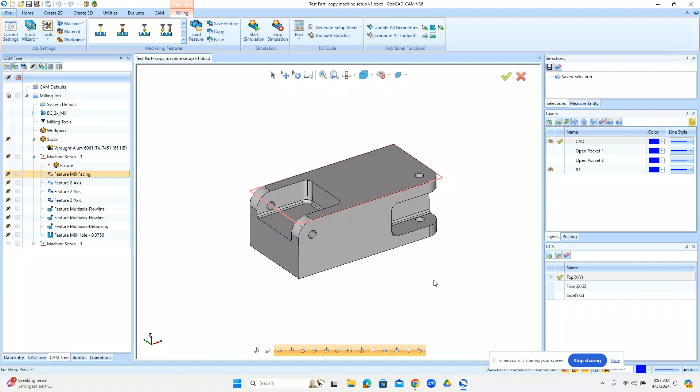Hey everybody, it's Al with CAD CAM Wizard, and today I wanted to talk about deburring. Not really a deep dive, but just kind of a sample. The other day I kind of went through the copy and paste of multiple machine setups, and what I want to do is get rid of that for a moment.

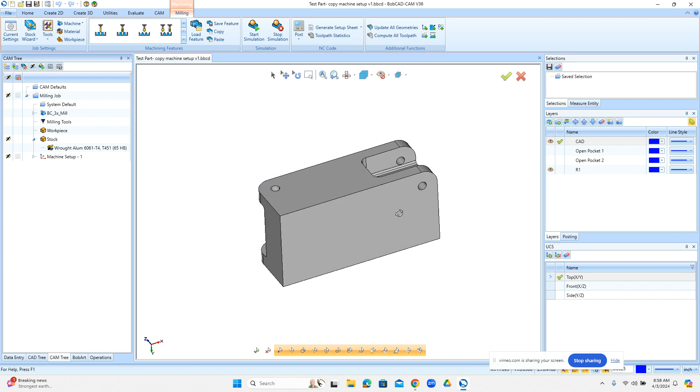And if we look at this part here, we can see there's a radius edge here, and we can see there's a radius edge here. Okay, the most efficient way to cut this radius is in this orientation. So either when this face is facing up, we'll be able to just run a profile around the part to put that on there. And when we're in this orientation, we can run a profile around the part to put that radius on there.

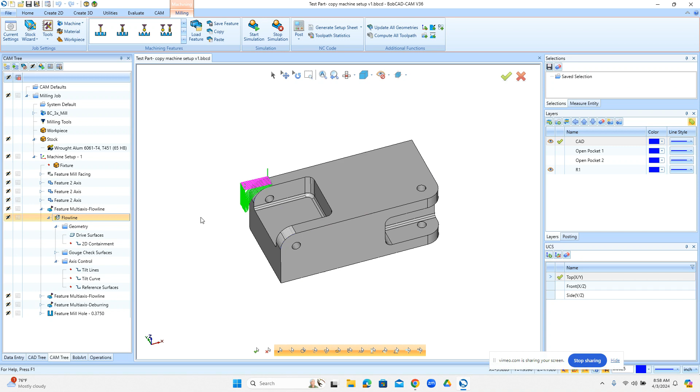Okay, now if we look at this profile here, I got an outside profile here to do that, but then I'm kind of left with this radius here, so rule of thumb is generally machine as much as you can within that setup. So that's kind of what I did. I came over here and I used some flowline routines to machine this radius here. But 3D is not going to be as fast as 2D, and the finish on this radius may or may not matter, but it's going to take longer, and it's not going to be the same finish as a 2D profile.

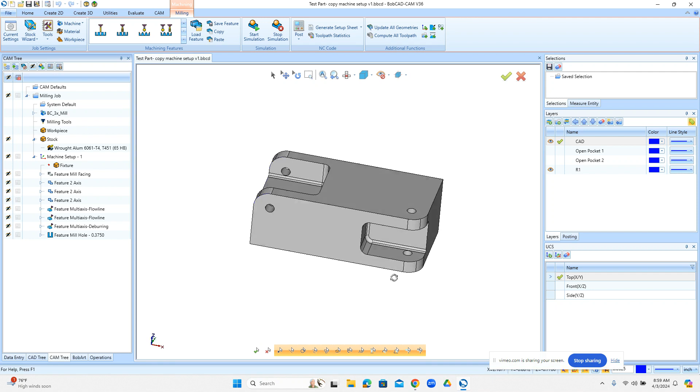So something you could consider doing is, when you need to come in here and break this edge, because you want to put a chamfer on it, you could either do that manually off the machine, but a lot of times we like to finish parts while they're on the machine for consistency and efficiency, right? So how can you break this edge here and be able to break this edge over here after this pocket is machined or what have you? How would we do that?

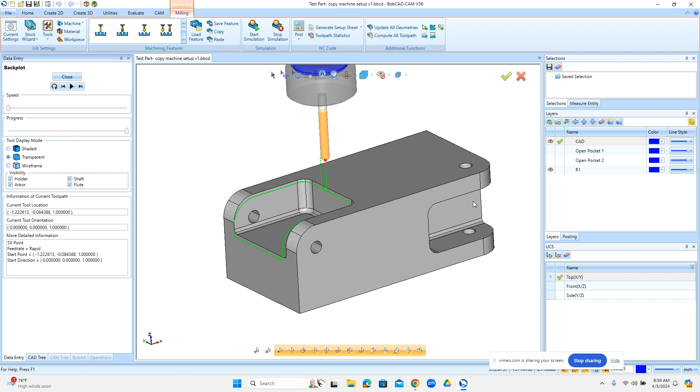So in this example, you can see I have the deburring routine set up, and it will come in and break this edge with a ball mill, which is great, but how can I break these edges down here? Well, sure you can. It's just a matter of utilizing the right tooling. Okay, so one thing we're going to do is come in here and change our tool from a ball mill, and what we want to use is a lollipop cutter, right?

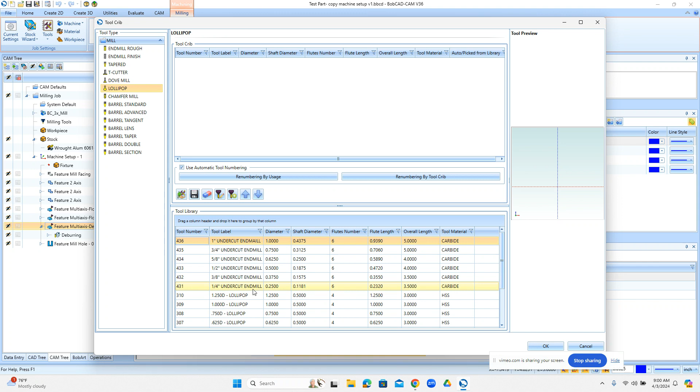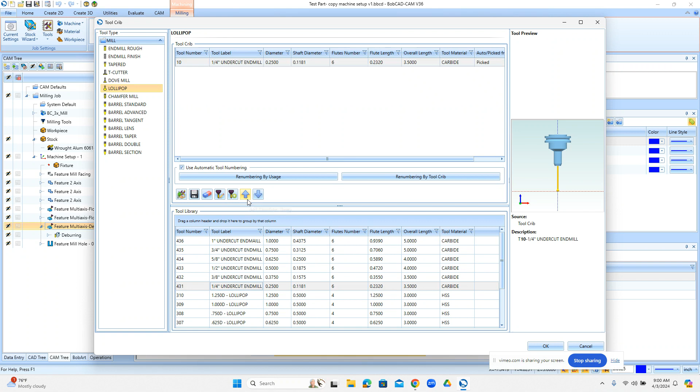So let's look for maybe a smaller one. Let's just go with this one here. So we're going to say that's the tool we want to use. Let me see if I did that right. Oh, I'm sorry. I got to go back to here. All right. I got to take this one here. I got to move it up there. Okay. So now I can select that one. And that gives me some clearance so that I can use the side of the lollipop in order to do the deburring, right? So let's go ahead and get back into our selection.

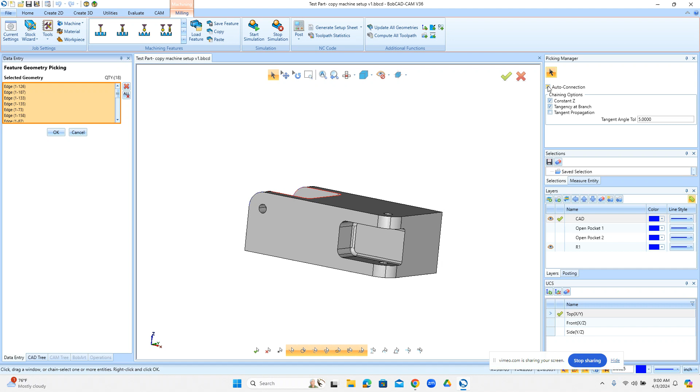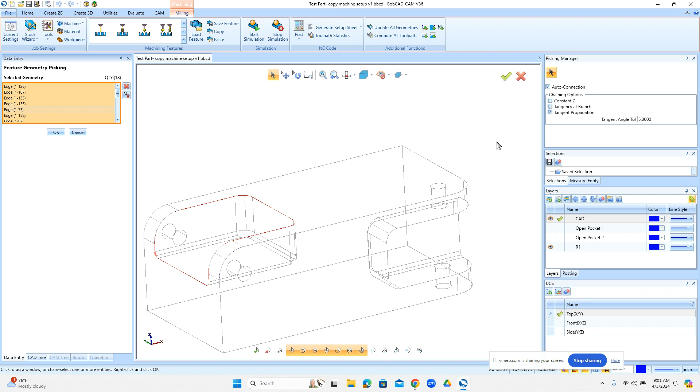Now, our selection here, we have one profile along here, but now we need to add this other profile along here. So let's go ahead and turn off these options here, turn on that option there. Let's go to a single click selection method. I don't know why it's... I'm not sure about that. So let's just clear our selection. Let's try it again. So we're going to go to here. Let's clear.

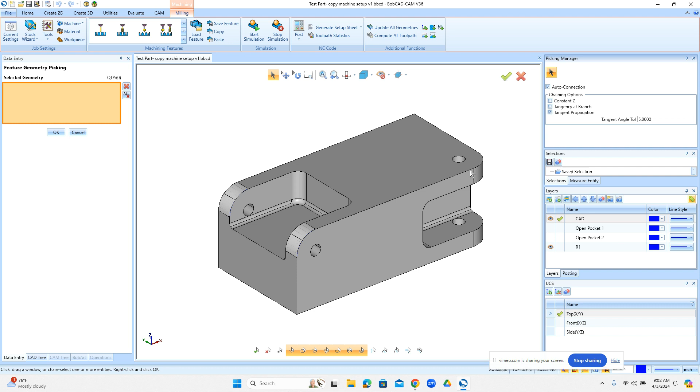Come on, BobCAD. Let's refresh. Brow. Brow. Brow. What's going on? I don't get it. I don't get what's happening here. Let's go ahead and delete that bad boy. Let's try this again.

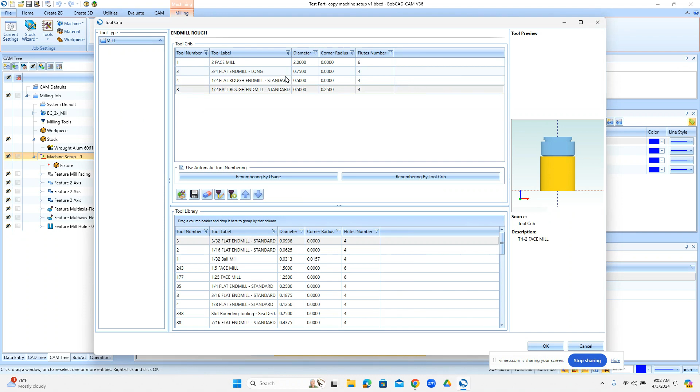Multi-axis, deburring. Next. Let's go back into here. Let's do lollipop. All right, we got this one. We're going to say okay. All right, let's go into here. This is going to be included curves. This. Yeah, I don't know.